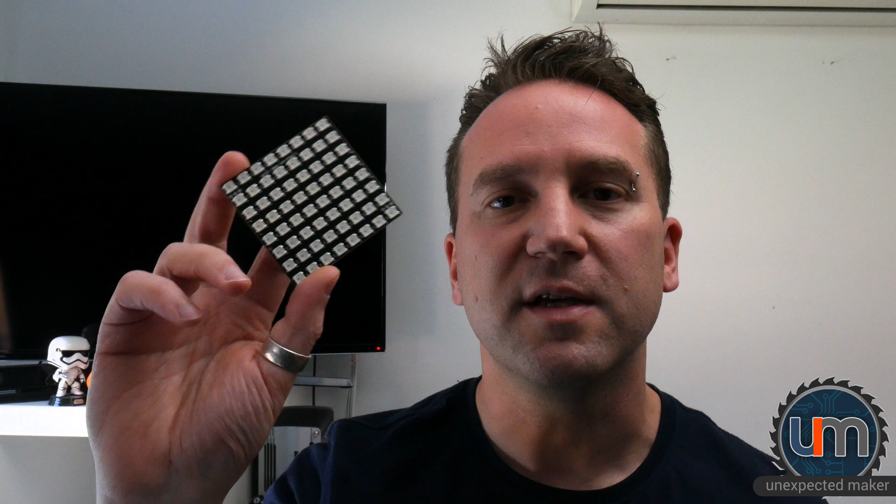Hey everyone, today we're going to do some Fusion 360 work to design an acrylic case for this 8x8 RGB matrix panel. Let's get to it.

I've got a new session of Fusion 360 open. The first thing you always want to do is click save, just to save your project. I've got a project folder called Nightlight, so I'm going to call this Nightlight Case.

Okay, so the first thing we want to do is create the outside shape. Now I know that the panel itself is 65.5 by 65.5, so I need a case that'll fit that inside it, that will also give me room to put screw holes and stuff like that. So probably need about 5 or 6 mil around it, so maybe we'll just start with 80 by 80.

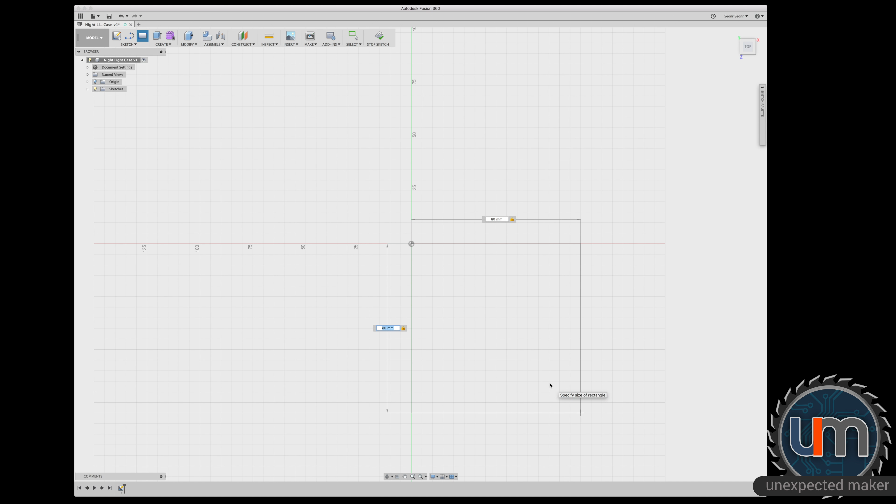So I'm just going to create a rectangle, 80 by 80. I'm anchoring it to the corner, that's what that red dot there means. You can see the dimensions on there is 80 by 80. This is not going to be a tutorial on how to use Fusion 360, by the way. I'm just going to build this, but I will highlight things as I'm going, if it makes sense.

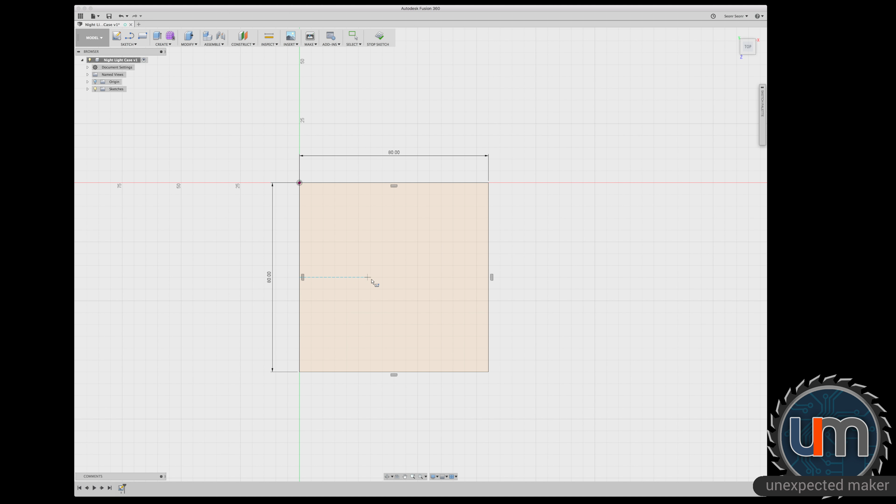So I need to put a square inside that. We don't want to use a rectangle like I just did, we want to do a center rectangle. So we need to work out the center. One thing you can do in Fusion is if you go and find some anchors and drag from them, it remembers the last anchors that you grabbed, as you just saw there, now I've got the center. So now I can just say I need it to be 65.5 by 65.5, it's all millimeters of course, and hit enter, and now I've got the area inside.

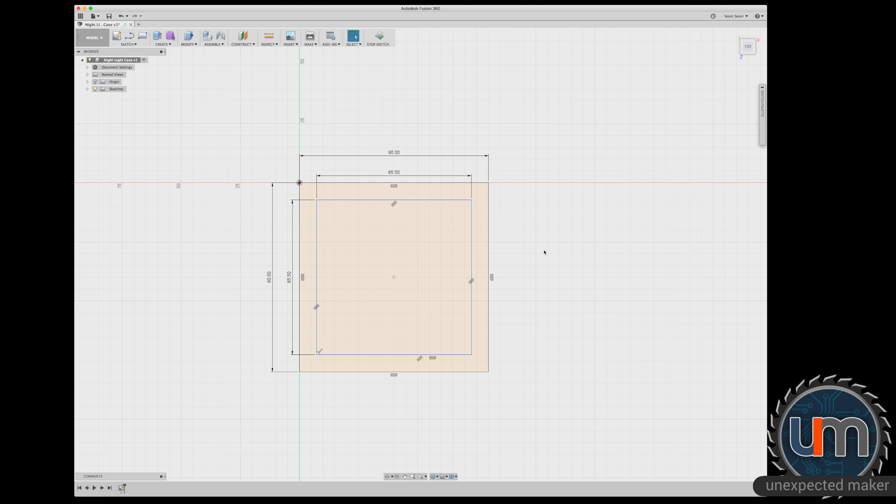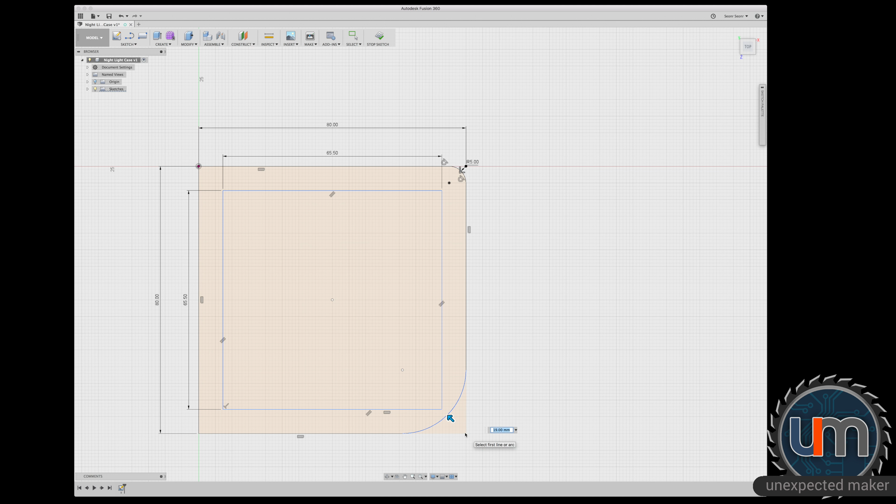Okay, I'm just going to get rid of these guides, I don't want them in there. So now I need to add screw holes, and what I'm going to do first is fillet the outside edges. So I want this to be, yeah, 5 looks good. Unfortunately I can't use the F shortcut because that's for filleting a 3D item, a body, not when in sketch mode.

So a lot of the sketch mode tools don't actually have shortcuts, which is really annoying. And one more fillet, to be 5, because I want it to have a nice round edge. I don't want it to be a square edge. My plan right now is to laser cut all of these shapes, so yeah, I just don't want a hard edge on it.

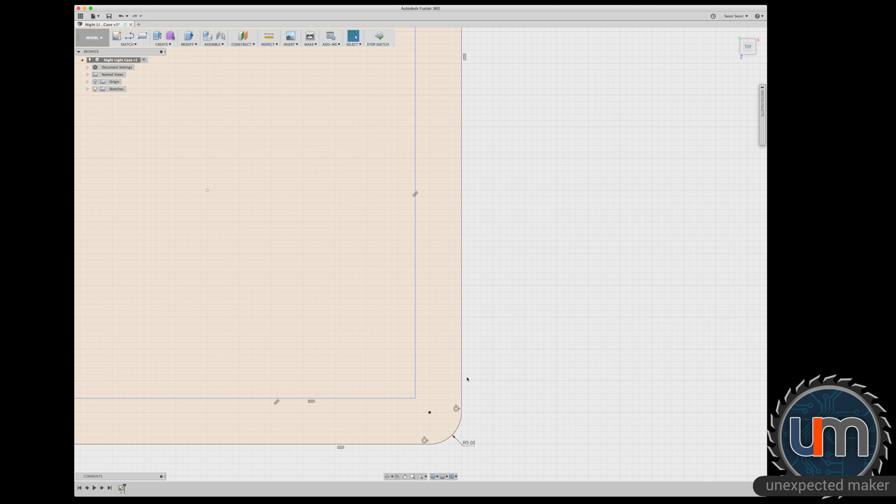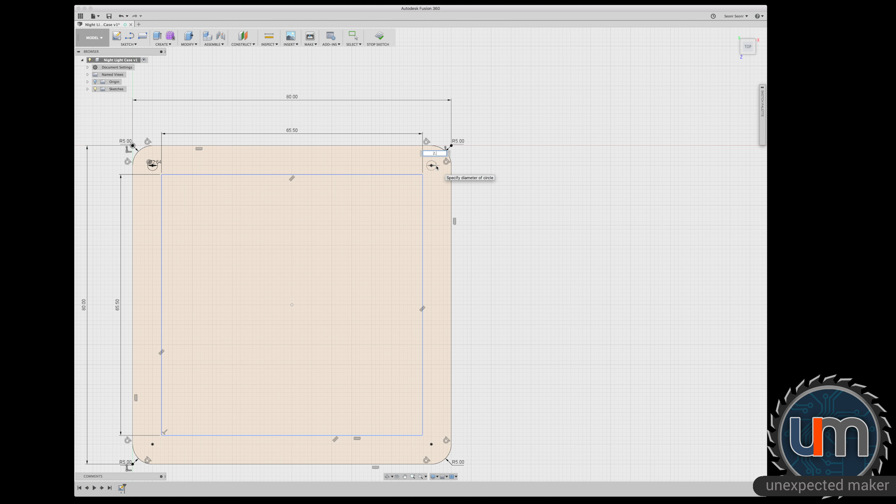Okay, I need to put screw holes in, and what we can actually do is utilize these control points that have been put in for the corners for the fillets, because they look like pretty good positions. So I'm going to do C, I'm going to stick one of these in, and I believe from memory they're 2.54 millimeters, that's for the M2.5. I think it's 2.5, but I'll make it 2.54 to give it just a little bit of extra give.

Okay, and one more. C for circle. Oops, 2.54. Okay, so I've now got the outside shape and a rectangle in the middle.

This sketch here can be used for two parts. It can be used without the rectangle in the middle for the front face, which is going to be in the tinted black acrylic, and then it can be for the next layer in, which is going to be the frame for the panel, and that's going to include this cut area.

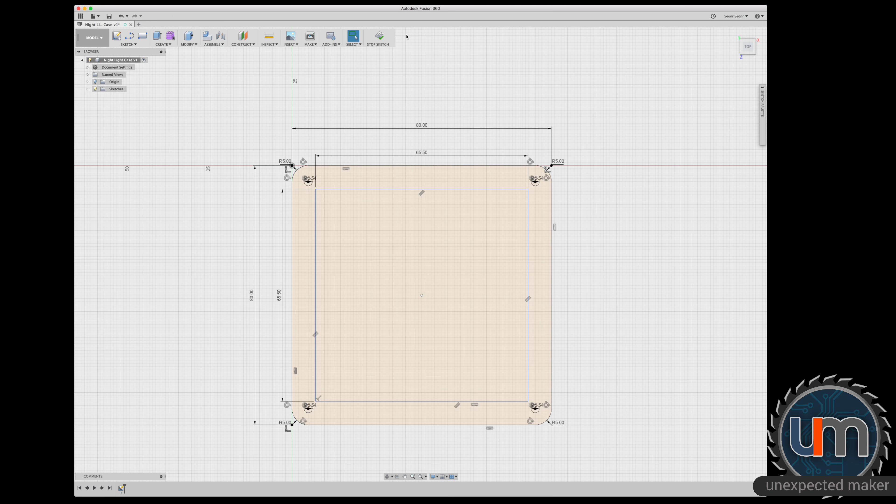So what I'm going to do straight away is grab it all, copy it, now I'll stop the sketch. I'm going to rename this to say inner frame.

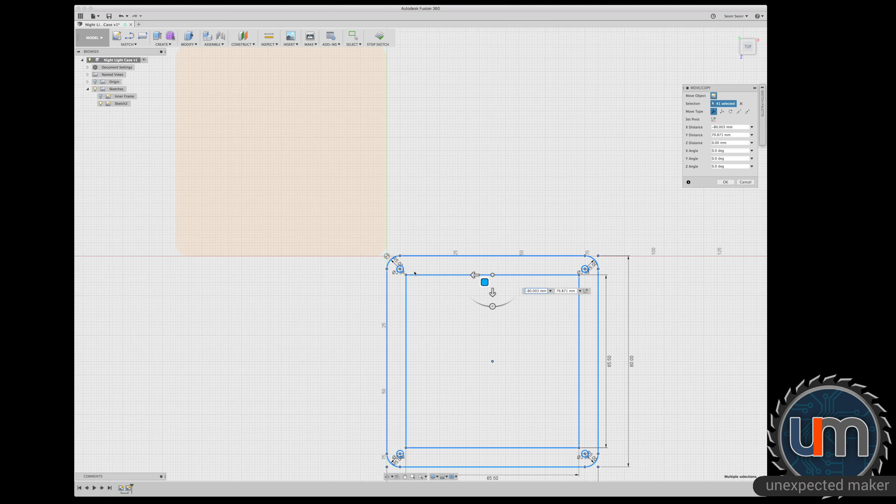Now I'm going to go new sketch, turn the other one off, and paste. And I hate how Fusion pastes stuff just kind of arbitrarily anywhere, it's really annoying, and you can't just easily move the anchor, the positional thing around. Yeah, this is really annoying. I mean, there must be a way of doing this in Fusion, I just don't know how. Maybe there's a different shortcut that I don't know about.

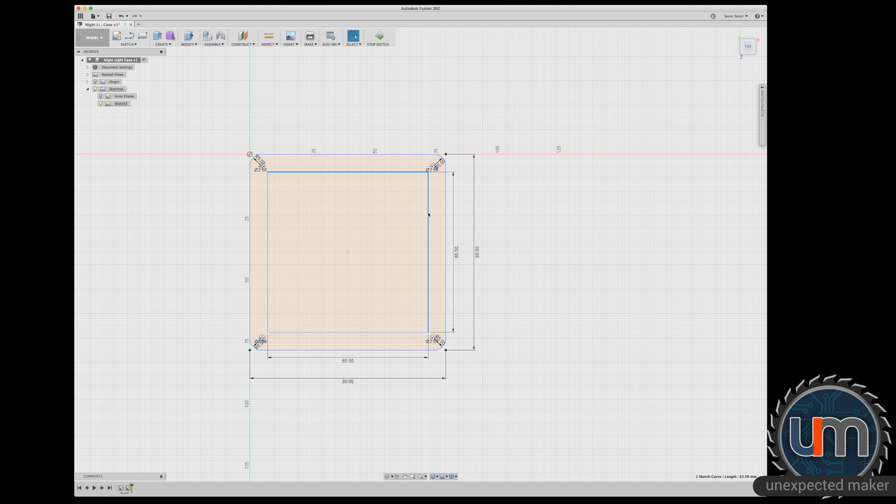Okay, so I've got the inner frame which has the rectangle. I actually don't want this rectangle in this one, this is going to be the front panel. So delete that back out, stop the sketch, and now I'll rename this front panel. Oh, there's no G in front. Okay, so now we've got two components, we've got the front panel and we've got the inner frame.

So now I need to make the back sections that's going to hold the D1 Mini in it. And I'd also like to somehow run a separate power cable in.

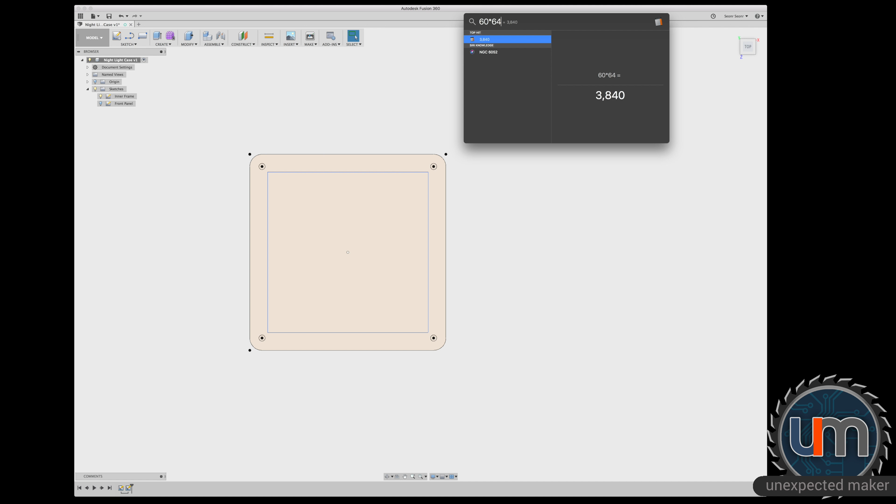So there's 64 LEDs on this panel, 8x8, and of course because they're NeoPixel style addressable LEDs, then technically they could go up to 60 milliamps each. And 60 milliamps by 64 is what? Let's find out what that is, shall we? 60 milliamps times 64 is 3.8 amps that could potentially go to, which is a lot of amps, and there's no way this D1 Mini could drive that.

So I need to have a place to hold the D1 Mini at the back. Luckily I've already solved something like that before with the Neo7Segment display, but I also need a place to put the plug, and the plug is a 10mm wide hexagonal kind of shape.

So instead of doing the back in layers of acrylic like I did with the 7-segment display, I might actually do it in 3D with the 3D printer, or at least do a middle section with the 3D printer so I can get it to exact specifications.

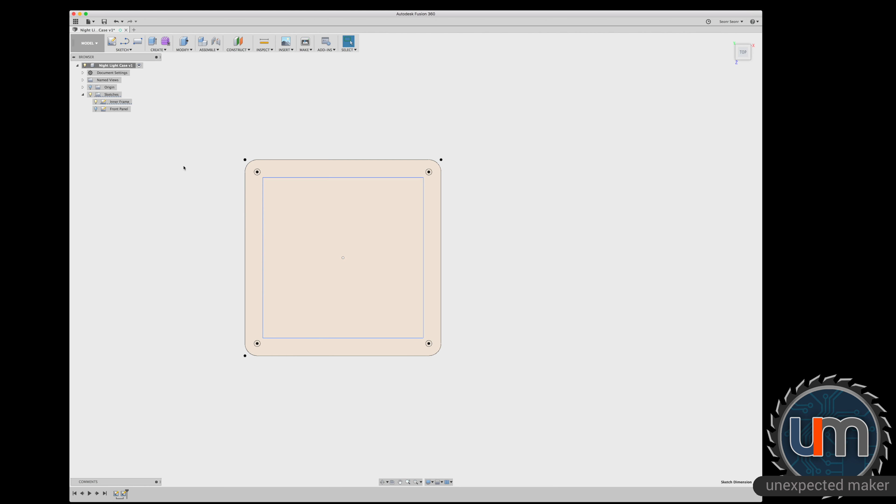That's what I'm thinking, so it's going to start off with this shape of the front panel. I want to go in here and edit this because I want this as a starting point. I'm going to copy it, stop sketch, create a new sketch, and of course it's going to stick it. Oh, that time it's stuck in the right spot, surprise surprise.

Okay, it's going to have holes in it. I'm still going to use acrylic probably at the back. I'm not even sure if I 3D print this that the shape and curves are going to line up nicely with the acrylic, because the laser cutter is very accurate with its cutting and the 3D printer is very inaccurate with its printing. But I'll start with this.

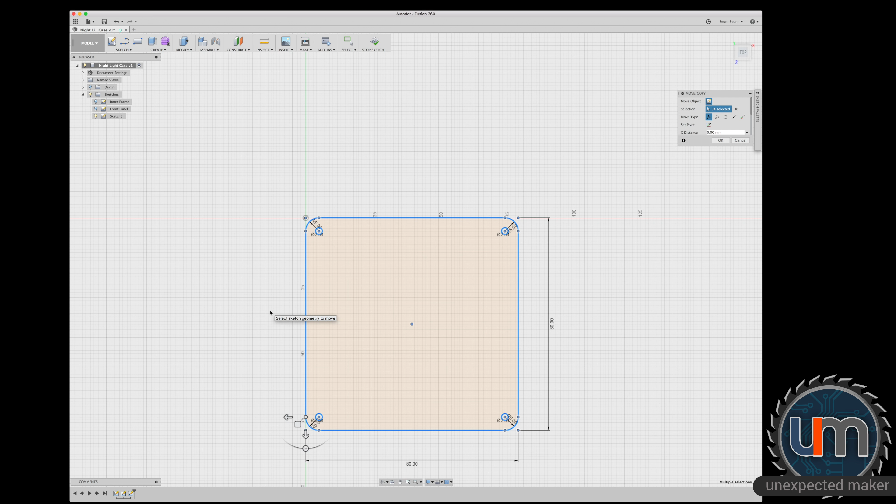So I'm going to need a place to put the D1 Mini, and I already have a layout for that I'm going to go grab from the 7-segment display and paste it in. So let's go do that now.

First thing, before I do that, I just want to save. Okay, so I've got to remember where it was. It's this one here, okay.

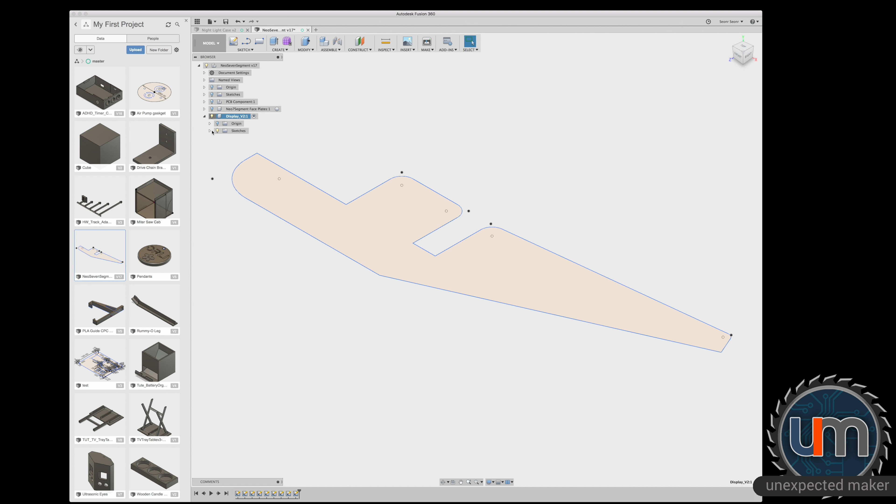This display's got a lot of different working pieces in it. It's this D1 Mini holder that we want, that's the shape there, so I want to edit the sketch. Luckily you can copy and paste between different projects. I'm going to go back to the nightlight, create a new sketch again, and put it in that for now.

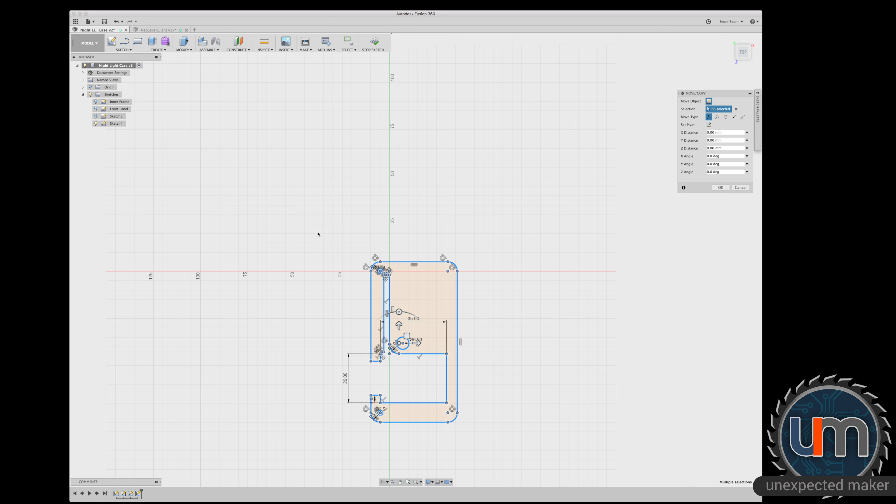Okay, so if I grab it all, it's going to be the wrong size. Okay, this will be moved over. Looks pretty good. Okay, it's too tall.

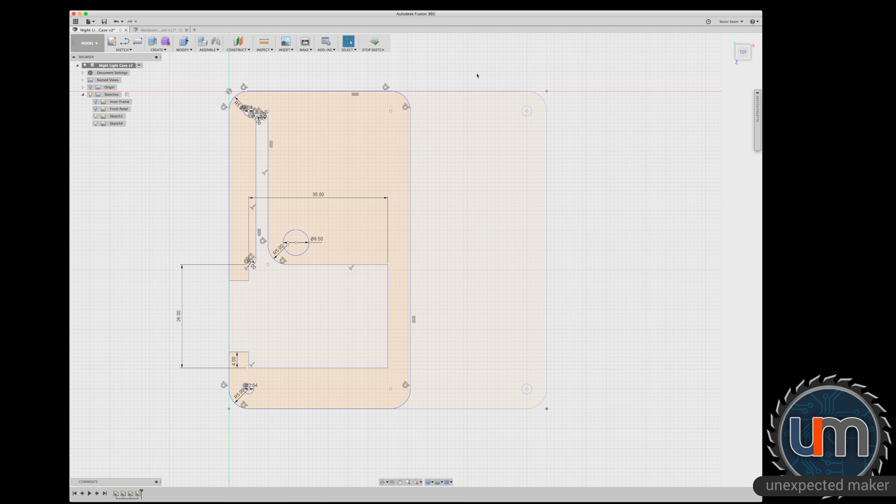Okay, got a lot of different anchors and constraints on here. Turn that back on again. So I want this to basically be the shape of the outside frame. That, I want that.

This is approximate right now. I'm going to have to do measurements on it to make sure that it's correct. And I need to stick holes in, so use the holes from the other one, using 2.54 as a guide.

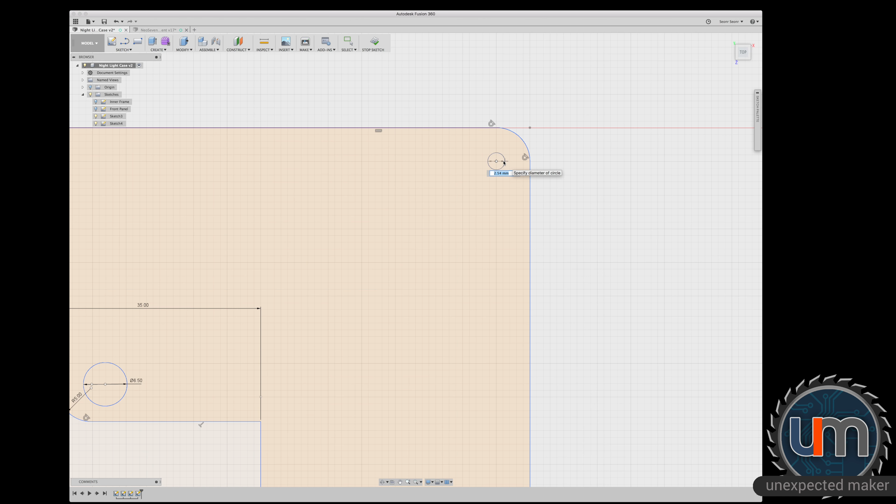So by using a different sketch in the background like that, if I go and place a hole, go 2.54 and paste it, it actually anchors it to the point behind. So you can actually anchor things to layers behind it. If I would have turned that off and just done it, it wouldn't have anchored it, but that's fine, I don't mind if it's anchored right now.

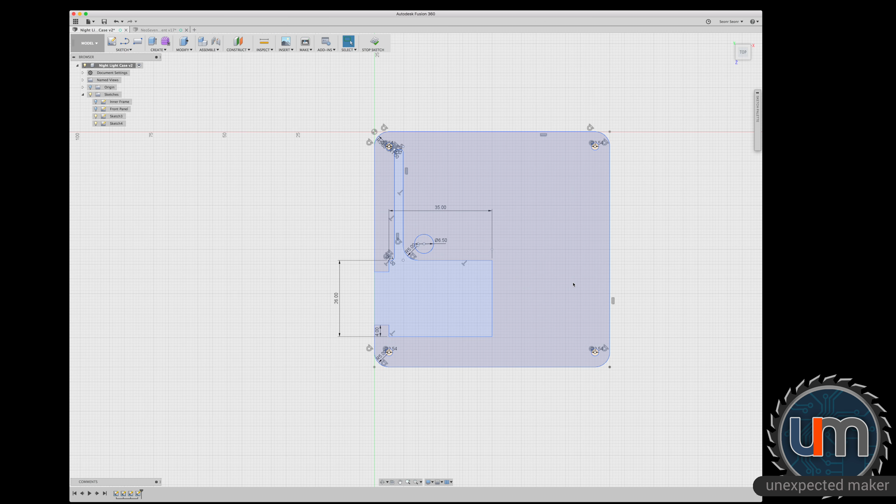So what I need to do is make sure that the distances between here and here are correct. That should be 80. So if I hit this I can do a measurement between here and here, and it shows me that the distance is 80.06 millimeters. Is that close enough?

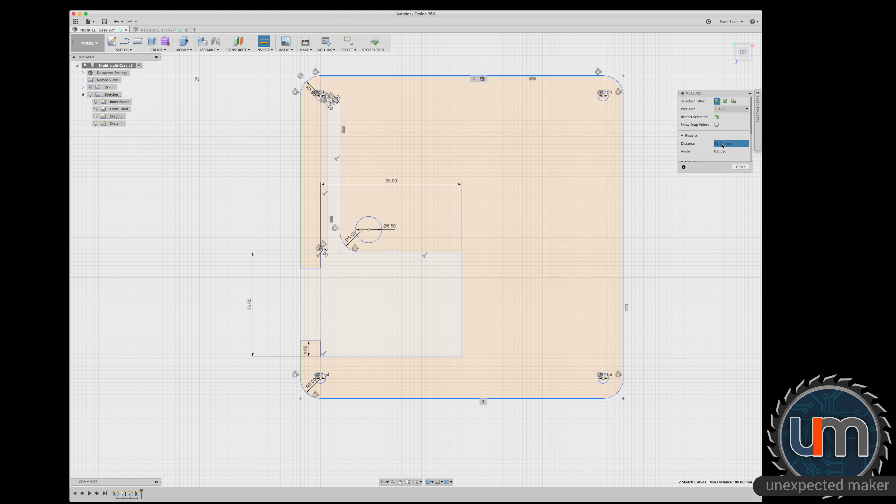I don't know, let's actually try this way as well, make sure this height is the same. It won't show me full length. That one's 80 exactly, so that's where the D1 Mini sits, which is great.

I don't know exactly where this is going to line up here, so what I'm going to do is just make a really big area for the wires, because we had issues with the wire space last time, if you would have seen the panel last time. Also, I don't need that.

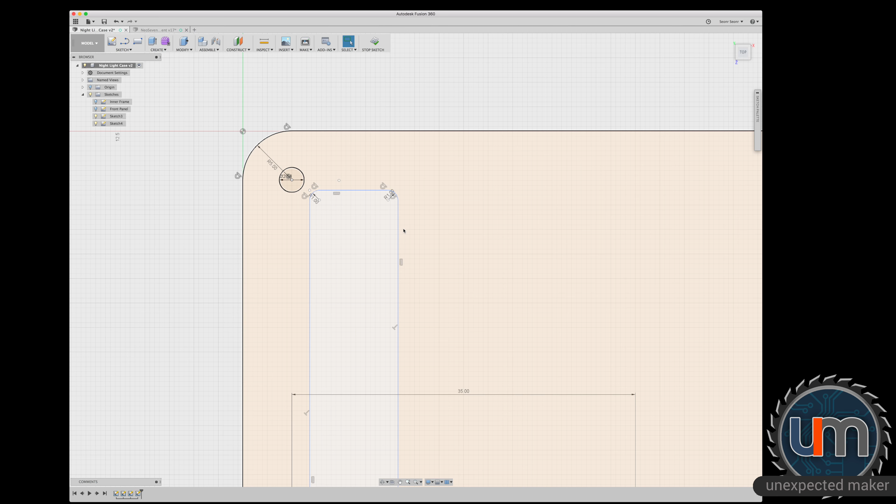Yeah, if you would have seen my video last time, I think it was a soldering Saturday, I was putting the panel together, I just couldn't get the wires in. It was really tight for the canal that I made.

So I'm going to also just move that over, get it away from that hole, make sure we've got more space. I'm going to lift this higher, just to make sure there's more space there. Yeah, I'm just going to make sure I've got plenty of space for my cabling.

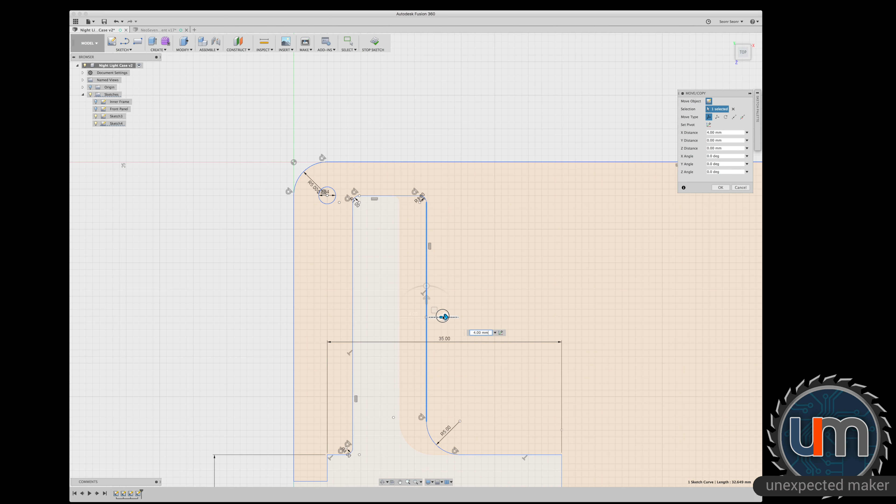The key is that this shape just here needs to be the same, because that's where the D1 Mini lodges into. I need that to be solid, but where the cable comes through is fine. So the next thing, yeah, this needs to be 6mm in thickness to hold the D1 Mini. And then I need the back panel.

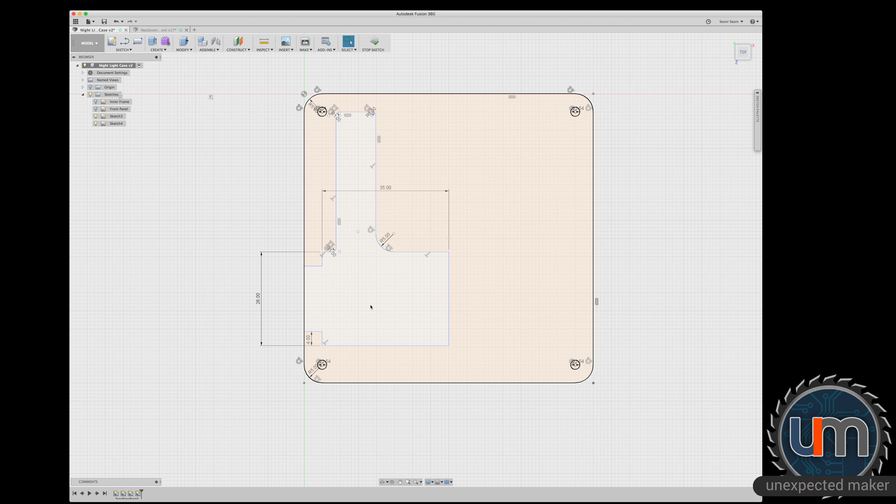Yeah, it's going to be hard to work out without printing it, trying it, printing it, trying it. Not quite sure how I'm going to get the power cable in and where I'm going to put the power cable. I think for the moment I'm just going to build all of this with acrylic, laser acrylic, and not actually use a 3D printer, to try to wedge everything in and use external power.

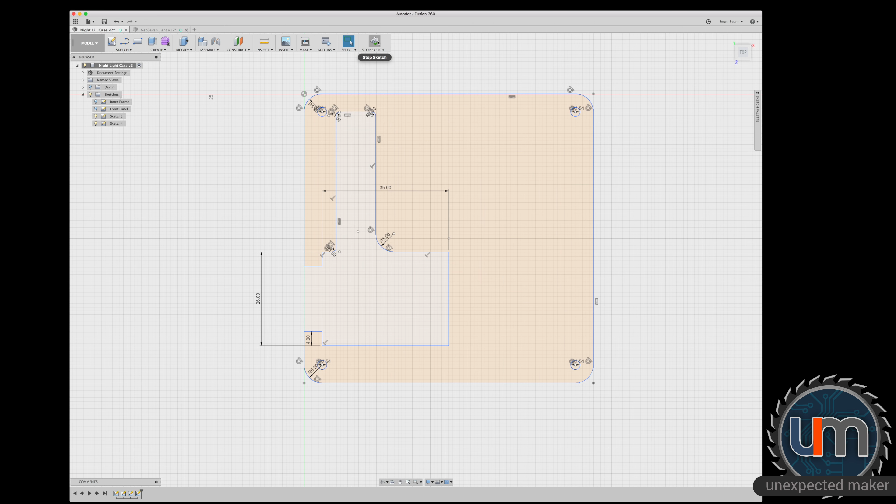For the development side of this project, I can definitely just do it off the D1 Mini as long as I'm careful with power draw. So I'm going to leave this as it is right now. I'm going to stop the sketch and call this D1 Mini holder.

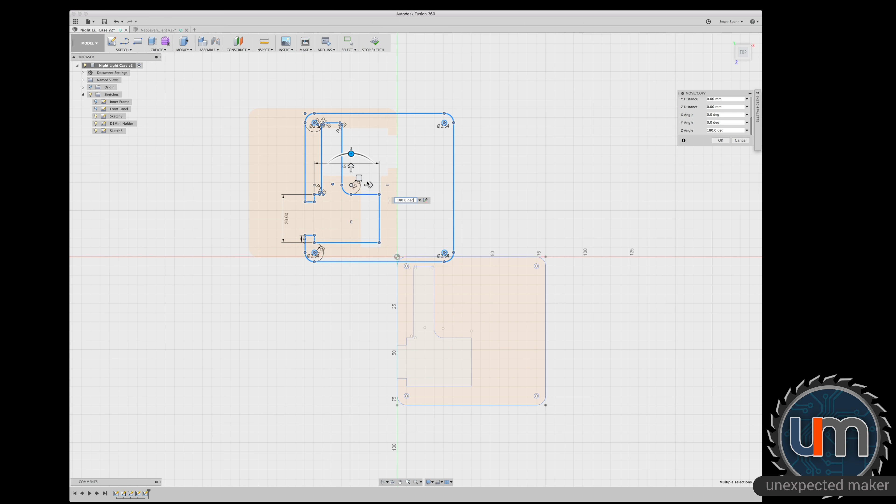I'm just going to go back in, copy it all, and create a new sketch, because I need the back now. Paste - oh, see, it hasn't even put it the right way around. How does it even do that? That is so annoying. What if I just rotate it 180 degrees? It should be snapping it anyway, but it's not. That is so annoying. Anyway, it's close enough for now, because I don't need the other layers on.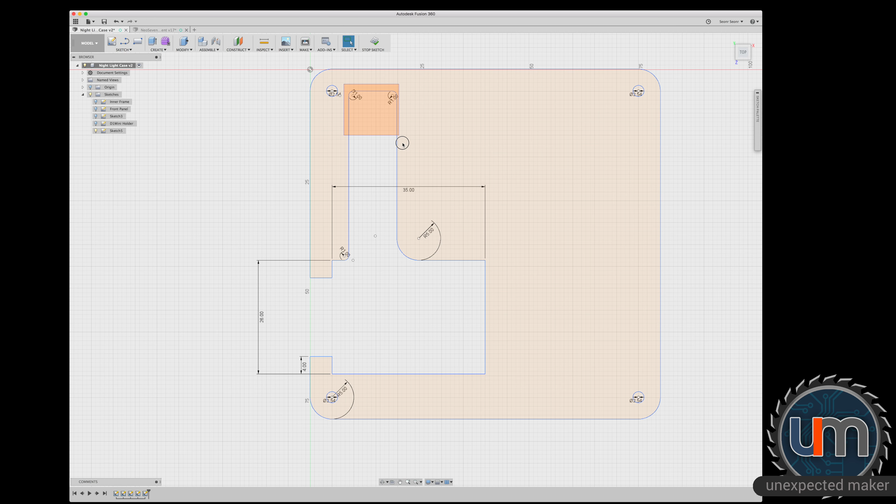So for the back panel, I need to keep an opening to make sure there's enough room for the USB to come through, but I don't need the rest of these. Don't need these, I can go that. Definitely don't need that. Or that - actually don't need any of those. Don't need those, that.

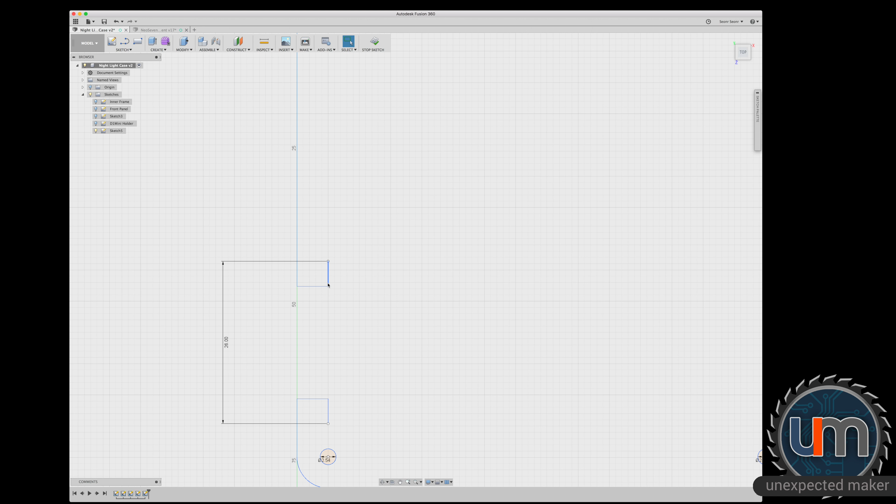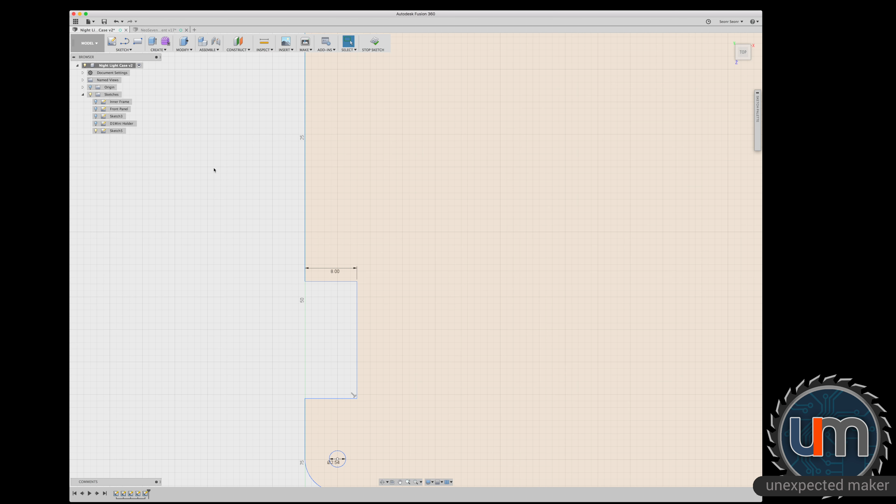What I do need to do is close all this up. I don't need that, don't need that. Create a line here, which closes up our shape again. I need to make sure that this here is about between 7 and 8 millimeters. So if I put a distance constraint on it, it's currently 5, make it 8. And the other thing I'll do while I'm here is just give it some nice bit of curve on the inside. So this is for the back panel.

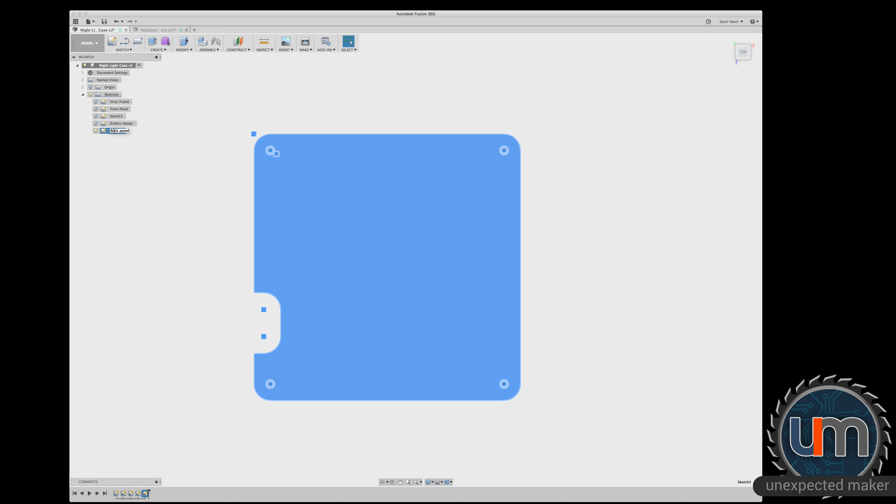Okay, so let me just save this and call it back panel. That sketch here we don't need - delete that, it's just got the front plate in it. So we have a back panel, the D1 Mini holder, our front panel, and then we've got the inner frame. Okay, so they're all the pieces we need. It's going to give us all our different shapes.

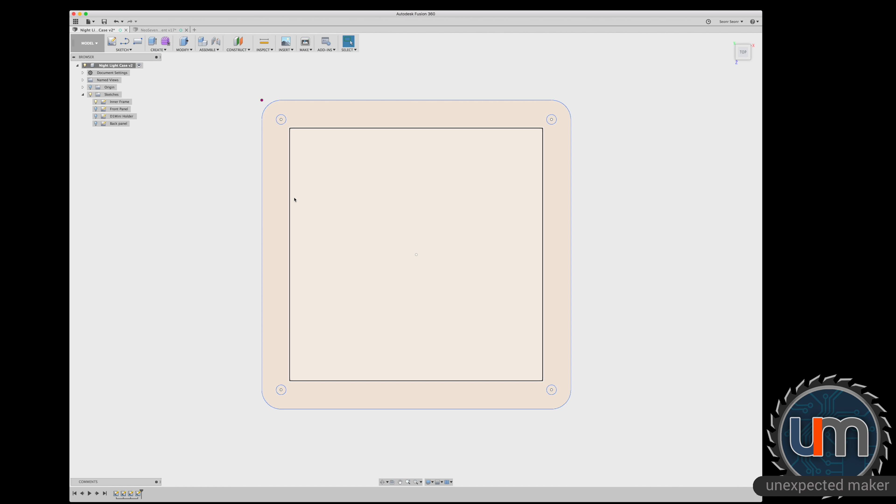So the next step is to export all of these and put them all inside Lightburn, which is my laser cutter software, and then cut all the pieces out. So let's start doing that. First thing you want to do is save as a DXF.

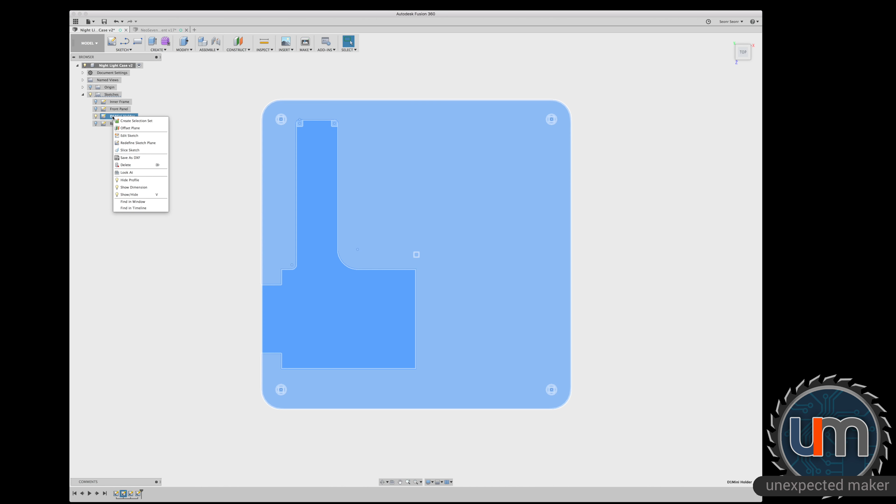So this is going to be inner frame. This one is going to be front. This one is going to be D1 Mini holder. And this one is going to be the back. Okay, so they're all different pieces.

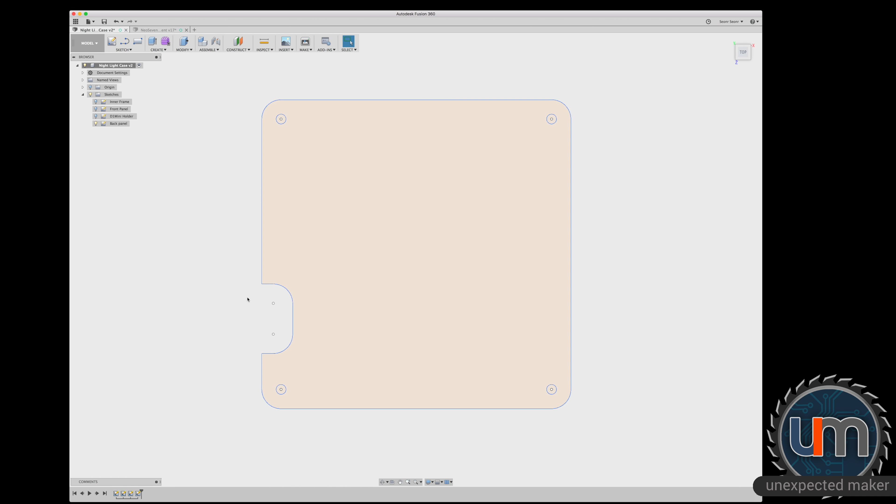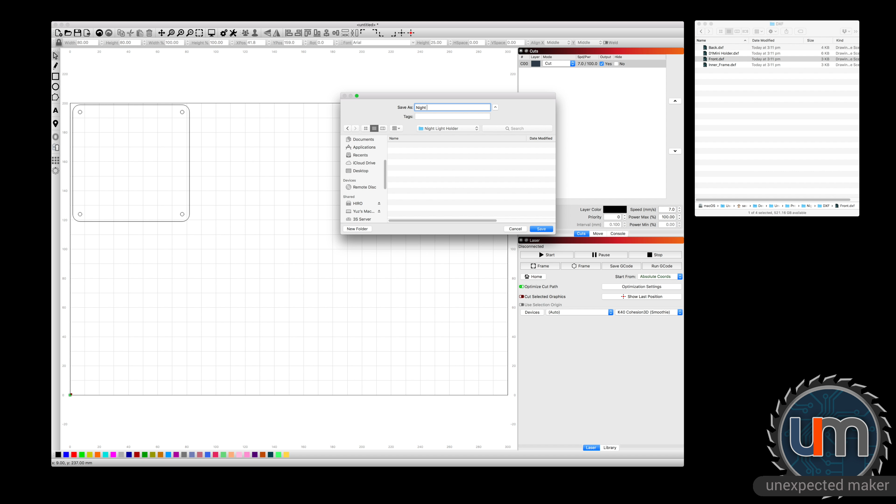The only thing that's going to be on the tinted acrylic one is going to be this cutout here. So I'm just going to save that. This is going to be called Night Light Black Tint 3mm, so it's going to be a 3mm thick acrylic.

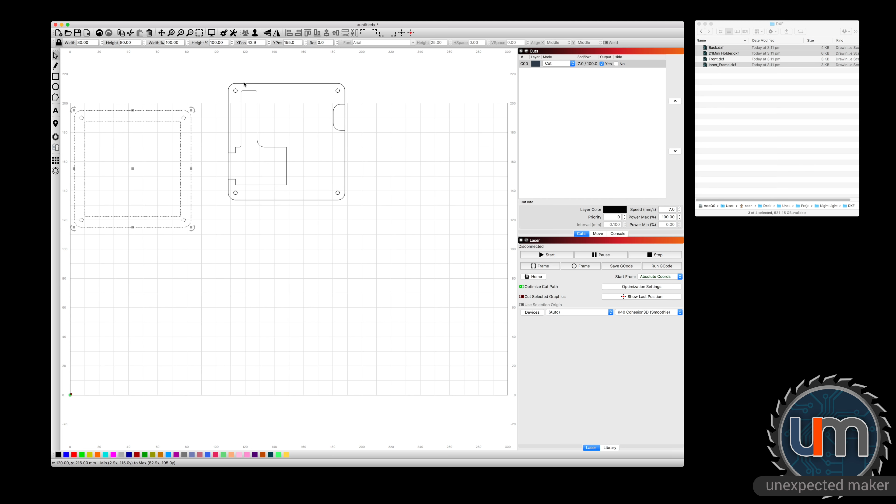Okay, that's one. And I'm going to start a new sheet, and everything else is going to be on the other layers. So I need the back, the mini, and the inner frame. I'm just going to lay them all out now. It doesn't really matter which angle they're on - I'm just going to select them all and align them vertically.

So I need 2 of these. These again are going to be 3mm black, but the actual D1 Mini housing area is 6mm, so I need to duplicate that. Doesn't matter where it is. Okay, so I've got 2 inner bits to hold the D1 Mini, the back plate, and the frame.

So that's it, so we'll save that, and we'll call that Night Light Black 3mm - they are different files. So I'm going to go cut these and then bring them back and put the D1 Mini together.

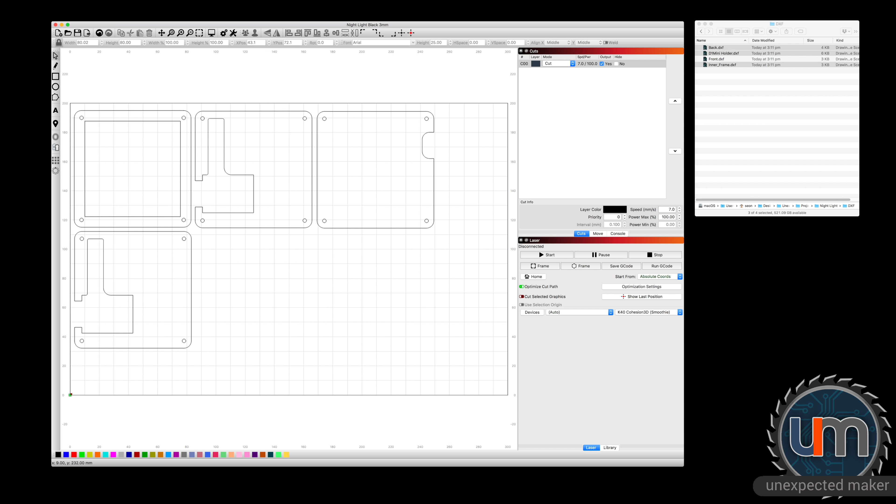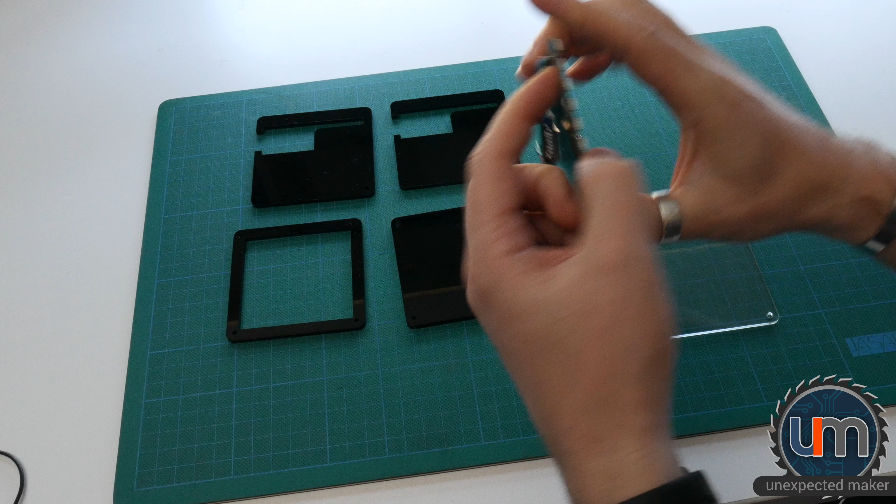Back soon. Okay, we're back from the laser cutting. There's a few changes I had to make, so I had to actually cut this a few times. The first thing you'll notice is the shape here of the holder for the D1 Mini is slightly different. I did have the cables running this way off the D1 Mini before. I had to move it because the actual panel itself, the origin point is here - when you turn it around, that's 0,0, and the LEDs go across this way, even though that's upside down, which meant I would have had the USB facing the bottom.

So that's the first thing. As you can see, I've got my D1 Mini soldered in. I'm not going to bore you with me soldering this together.

I made the cables a bit long, but that's okay. The other thing I changed was, as you would have seen in Lightburn before, I had it arrayed with black on top and a black piece at the bottom. But I had a sheet of black that had the bottom section gone, so I only had enough room for 3 items on top. I had a scrap of clear acrylic lying around, so I did the back section from that, just so I didn't waste a whole new sheet, especially since this is temporary. I just want something for now to put it all together so I can play with the programming on this board. So let's put it all together.

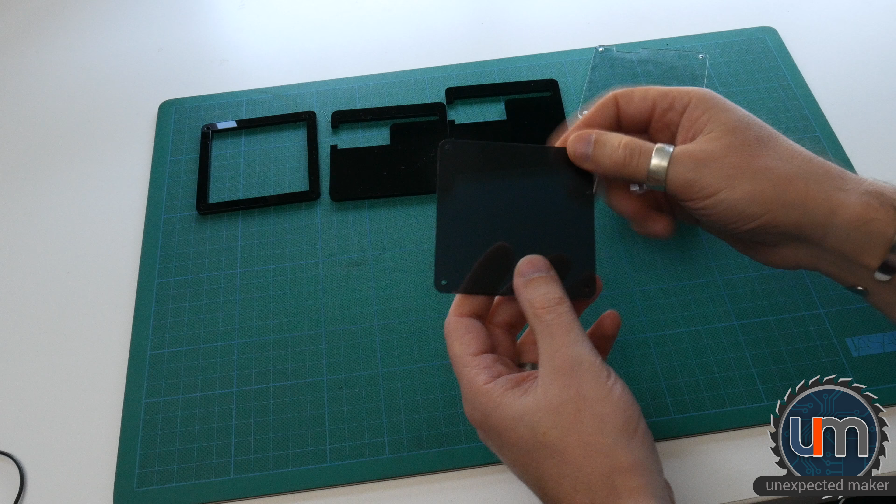This is obviously the tinted front, as you can see through it. It's pretty cool. My office is quite dusty, lots of flecks of dust everywhere. When you cut these pieces and pull the paper off, it attracts so much dust because of the static it produces. So let's start by getting some of these screws in.

I already have some code on the panel, so we'll be able to see it working as soon as I put it together.

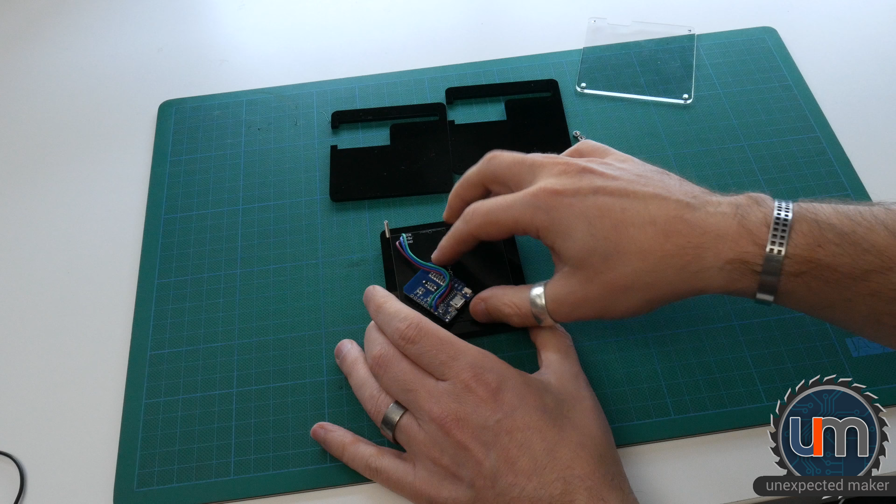Okay, let's get the frame in. Okay, it sits nicely just in there. I might get this wrong, let's find out. Right, that's right, I remember now, yeah, it would have been the wrong way around.

So this is not ideal, this is temporary. This just means the D1 Mini is going to sit at the top and not at the bottom, and it probably won't be fantastic either. Okay, so that's in place, which is great. Let's put the back piece on to hold it still.

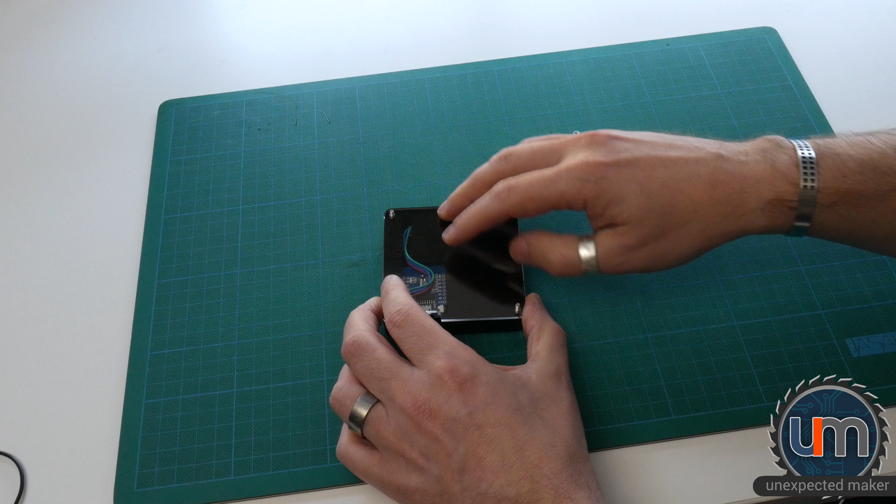Okay, already I can see there's a problem. I'm not going to lift it up to show you just yet, but I haven't cut this back section far enough, so it's clipping the end of the USB. It needs to come back another mil or two, so there's going to be a slight gap here. But that's okay for now. Let's just get this in.

I mentioned before in one of my previous videos that I really enjoy the product design phase, designing all the pieces that go together, but I find it really challenging. It's hard to visualize and conceptualize inside Fusion 360, especially with a laser cutter, because I'm not actually building this in 3D, so I don't end up with bodies and shapes and components inside Fusion 360 to look at. I could make a whole bunch of bodies that are all like 3mm laser cut pieces.

But yeah, I didn't. Okay, so that is the panel here. I don't know which way the top's going to be, we'll find out. That's all of it put together.

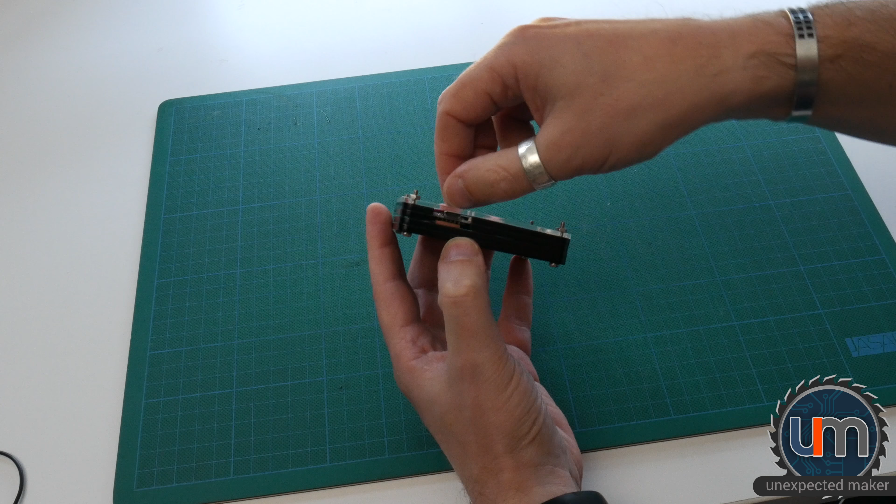The clear acrylic I used in the back is actually only 2mm, not 3, just because that's what I had lying around. So there's a bit of extra length on the bolts, and you can see here there's a bit of a gap, because the USB port is actually pushing this up. So it's got a bit of a gap there, but for now this will work fine.

So I've got a cable here, which should just... yeah, it's not great balancing now because of the USB. That's actually upside down, I believe. Will it go anywhere? There you go.

So what this does, the code right now - I'm not going to go through the code, it's really simple - it just checks to see if it can get online, and if it can, it starts every 2 seconds flipping between 2 different images.

I'm having a bit of a play, you'll notice all the purple's solid, but I'm trying to get it to display a circle nicely, and it's only 8 by 8, so there's not a lot of density there. So I'm playing around with dithering the outside edges, getting them duller and softer as they go around, to try to make it more of a soft circle.

But there it is, that's the display we just put together. It's pretty straightforward, just like my Neo 7 segment display in terms of the way it holds the D1 Mini at the back. But it's perfect for what I need now for development. At least I don't have a bare board just sitting there with wires hanging around.

It's quite sturdy. In a future video I will do some more with this. I'm not sure what it's going to be or when it's going to be yet.